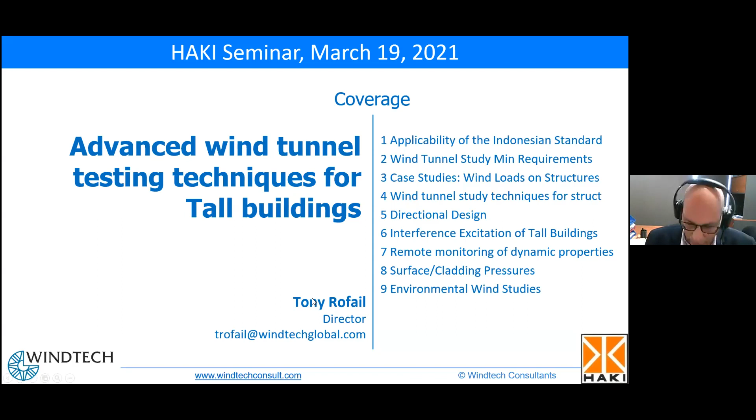Okay, so the Indonesian standard sets out different methods. One of these methods includes wind tunnel testing procedure. Okay, and this is if you can refer to chapter 31 of the Indonesian standard for those details.

Okay, but this wind tunnel study carries the same weight as using the Indonesian standard. Okay, so if it's undertaken, it must supersede the Indonesian standard up to a certain limit. So if the wind tunnel results provide loads that are less than 80% of the estimates in the Indonesian standard, then the 80% of the design loads become the lower bound value. So it must be not less than that.

Now, a lot of structural engineers correctly state that seismic design generally governs over wind design in Indonesia. And that is very much true, especially with regards to design for strength. However, equally important to the design for strength is design for serviceability and for occupant comfort due to building motion.

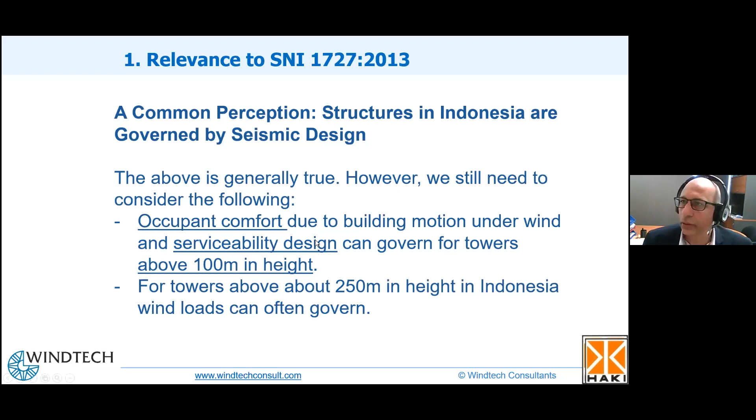Okay. Another aspect of wind tunnel testing, which I will cover towards the end of my presentation, and which has been proven to be a very important part of value engineering for the building design, is a study of the facade design pressures. So on average, from my experience and getting feedback from my clients, there's a 12% saving in the facade package simply by undertaking a wind tunnel study, and that's on average.

So in some cases, it could be a lot more than that, especially if it's in a high density area with a lot of shielding. If the building is much taller than the surrounds and exposed, you might get at least a few percent saving. But if you do the maths, even a few percent saving can pay for the wind tunnel study 20, 30 times over. So it's definitely a worthwhile exercise.

And as a rule of thumb, I would recommend it for all buildings with more than 5,000 square meters of facade area or more than 70 meters in height. So it's almost guaranteed that you will get many times the cost of the study back in terms of savings, because of the nature of codes needing to be somewhat conservative to cover any unexpected or unusual cases.

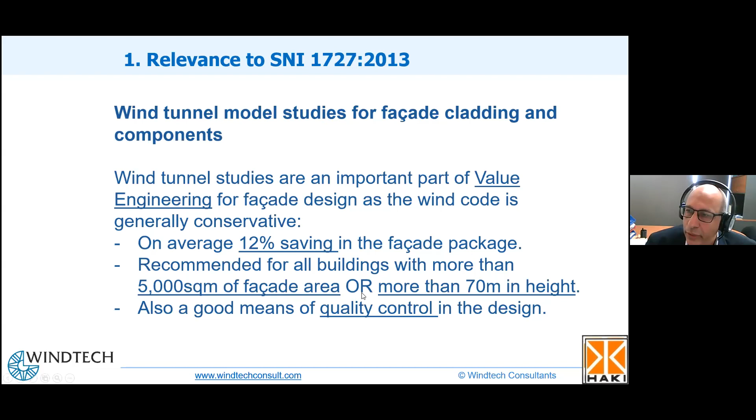Now section 27.1.3 does state that there are limitations in the use of the standard, like any other standard. There are limits to the applicability. And I've underlined the important part of that phrase: buildings that have unusual shapes or unusual response characteristics. Okay, so if you are designing a building that falls in either of those two categories, then you are required to undertake a wind tunnel study for wind.

Okay, so unusual dynamic response could include cases where the design loads are governed by crosswind response, where the standard does not actually cover that case. And as a rule of thumb, this case can occur where the height over width ratio exceeds 5. So basically for the more slender towers. And again, buildings taller than, say, 150 meters, you could get crosswind governing based on the Indonesian climate. So just keep those two things in mind.

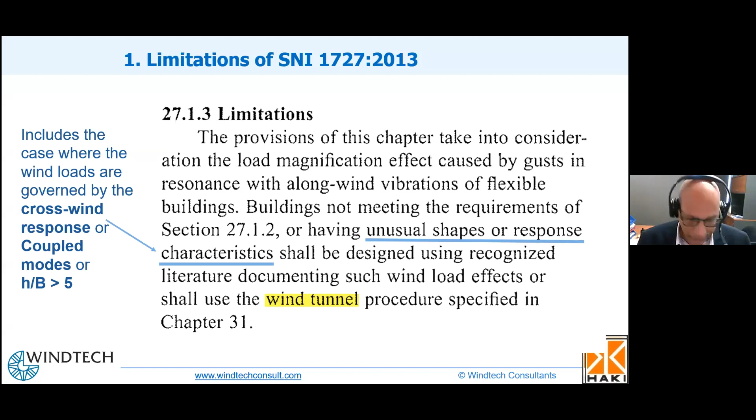Okay, so I've covered cases basically to expand a bit on the crosswind response. There's a very good guide in the Hong Kong Code of Practice. It says that buildings with height over 100 meters in Hong Kong, but that's in the Hong Kong climate, so I translate that to be over 150 meters in Indonesia.

Okay, and they specify height over width for the smallest overall plan width. Where that exceeds 7, okay, so I would say 7 or 5 or 7, something in that range would potentially trigger a case where the crosswind response would govern, which is not really accounted for in the Indonesian wind code.

So if the above is true, but the fundamental frequency is higher than 0.5 hertz, then you don't have to worry about that. Okay. But if it is lower than 0.5 hertz and it satisfies the above, then a wind tunnel study is required.

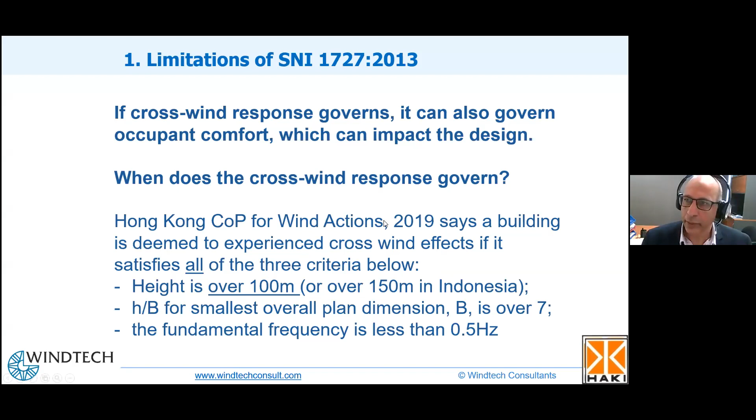We need to cover off some important aspects which I covered at the beginning, and that is: irrespective of what the loads come out from the wind tunnel study, they must not be less than 80% of the design loads stipulated in the Indonesian standard.

Next point - I'll cover this later, but another limitation of the Indonesian standard, or all standards really, perhaps with the exception of the Indian standard, is that there is no provision for cases where there is an interference excitation. So what does that mean?

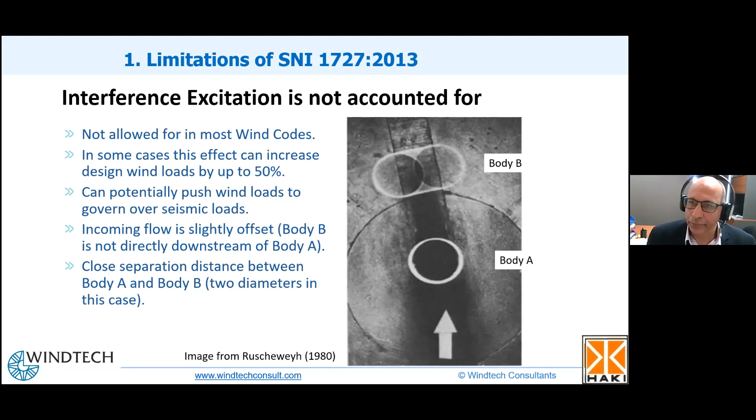It's very important to include the surrounding buildings up to about 400 meters radius. Why is that important? It's because of the effect I just mentioned earlier, the interference excitation. Based on the research I undertook in the late 1980s, I have found that going past about 400 meters, buildings don't generate that much of an influence in terms of interference effects. Hence, it is sufficient to incorporate the effect of the building morphology around the site only up to that extent.

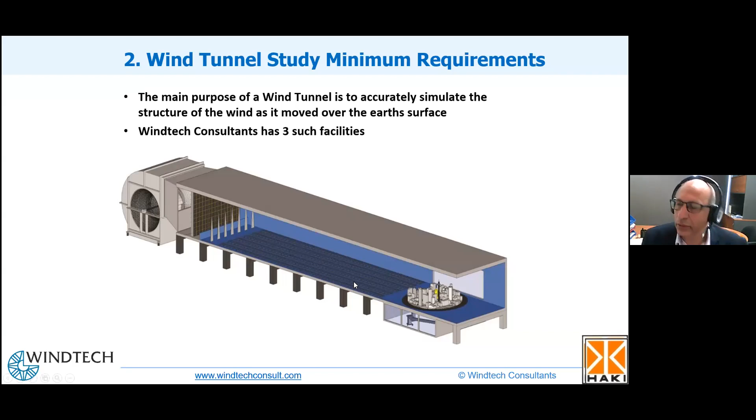Beyond that radius, it's still very important to match the same behavior of the wind as it approaches the precinct, and to the right scale. So what are the factors that tell us we are matching this profile very well? Before I go into that, I have to explain that sometimes this is not a very simple task - just assessing what is that terrain upstream.

And that's done for different directions, obviously. So not only does the wind speed at the site change with direction based on the wind climate, but it's also influenced by the upstream terrain. So all of these have to be factored in when we're modeling it in the wind tunnel.

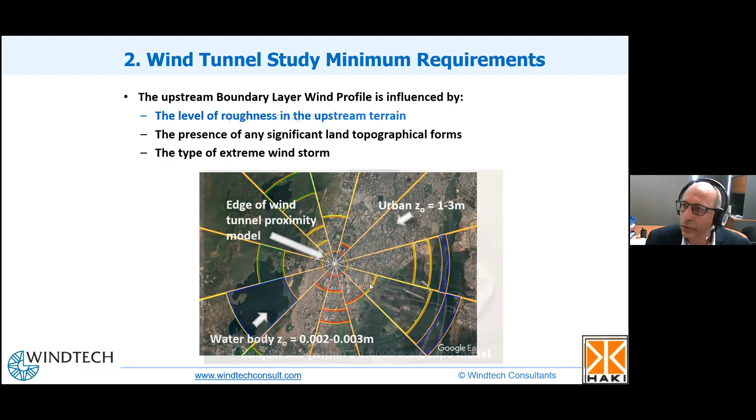Another factor is if the site is very close to a significant mountain or hill, that can also distort the flow significantly. As a rule of thumb, if the height difference between the peak of the mountain and the site is more than 10% of the distance away from the peak to the site, that would indicate the effect can be significant, and it's really advisable that this effect is actually quantified using this type of study, which we call a topographic study.

And this doesn't happen very often in Indonesia, but it may. This is just for your information.

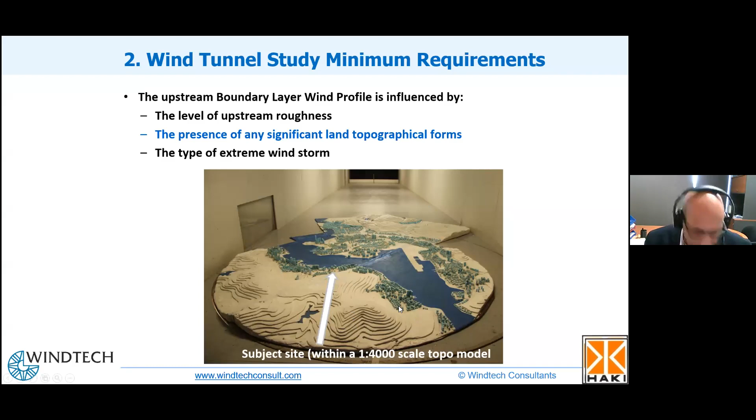But that shape has to match between the model and the full scale, okay? And same with the turbulence intensity. So these are the two most important parameters, and they help us to ensure that we're matching that at the correct scale in the model.

Another important factor is the spectral density. So if you take the wind speed and you apply a fast Fourier transform to see where the energy is concentrated at what frequency...

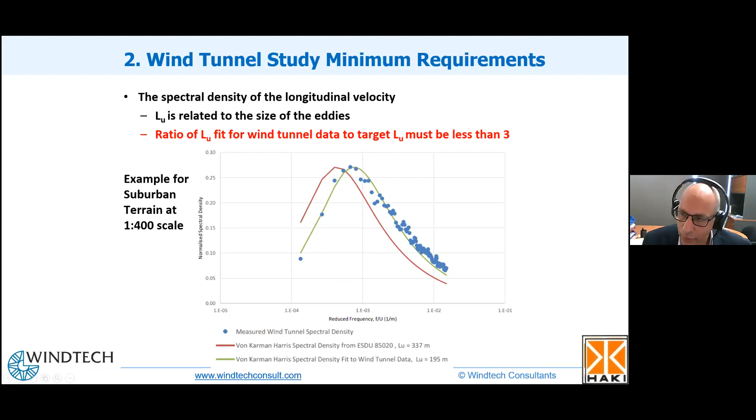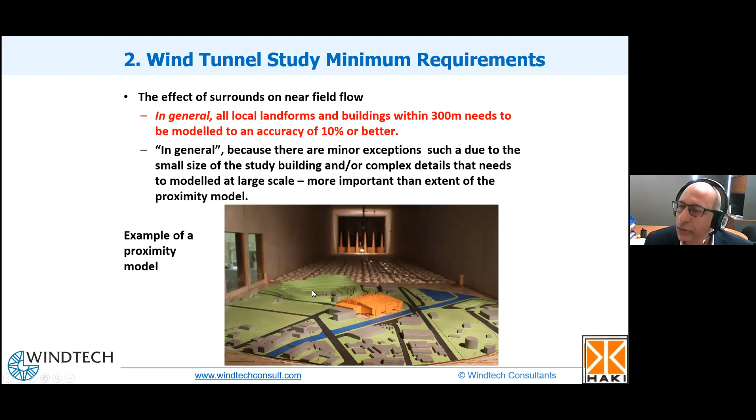The study model within the surrounds should incorporate any other effects, not just the surrounding buildings, but any topographic effects, such as this small section of hill you can see in the background.

Now, blockage is a very important consideration. The wind tunnel cross-section versus the cross-section of the model at any point along the cross-section of our surrounds must not be more than 10% of the cross-section of the wind tunnel. If it does exceed that, there will tend to be a speed up of wind around the model, which could exaggerate the effect of the wind, which is what we don't want to happen.

Now, in this particular wind tunnel, one of our 3 wind tunnels, it's got what we call a blockage tolerant test section. It's got this open plenum behind a slatted or partly porous ceiling, which lets some of the air seep into this plenum and back out. Tests that we've done with this design allow us to increase the blockage up to about 17% if we need to. But the model you see at the moment is already less than 10%.

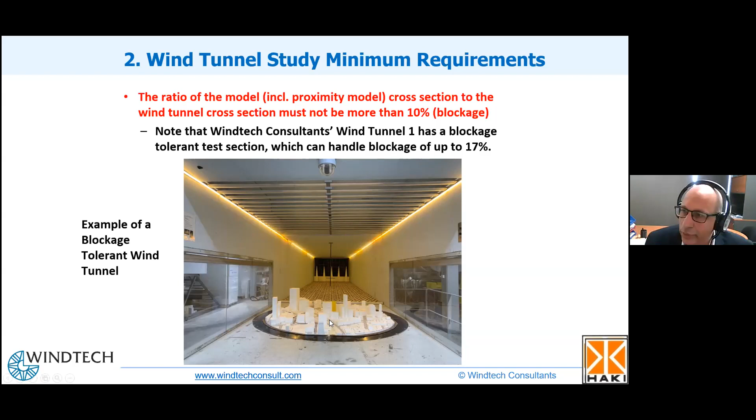Okay, and finally, but not a small factor, a very important factor is the speed in the wind tunnel must be high enough. The speed in the wind tunnel and the scale or size of the model needs to be, the combination of those two contribute to something called the Reynolds number. So the mean wind speed at the building height times the characteristic cross-section width of the building, divided by the viscosity constant of air, must be larger than a certain minimum value to ensure that the flow regime around our building matches the real world.

And you can see here, for different Reynolds numbers, you get different flow regimes. That's different for circular shaped cross sections compared to square or sharp edge. For sharp edges, they're not as sensitive to this effect as circular cross sections, so they need to be particularly high for circular cross sections to match full scale.

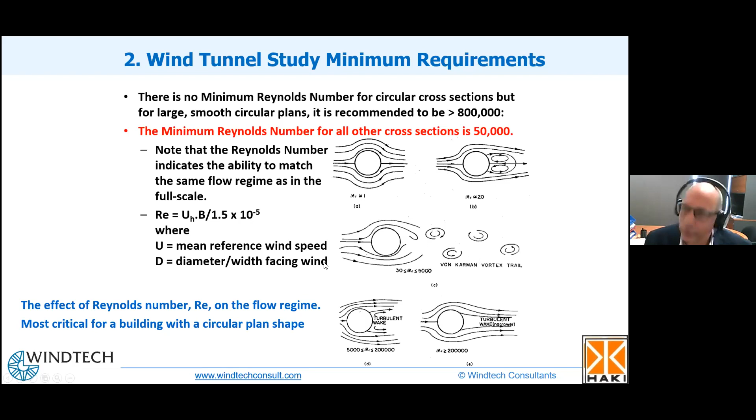Now, what are the typical outputs we get from a structural load study? First, at Windtech, we provide a headline overturning base moment about the translational axes and the torsional mode, and compare it against a number of standards.

And it's for that reason that if you do find crosswind is governing, you are advised to immediately undertake a wind tunnel study, because the only takeaway from using these codes is just to do that check. I would not base the design on the code estimate if crosswind is governing - it's just a check to indicate that you should be moving to a wind tunnel study.

We also provide outputs of the tip acceleration at the top of the building, in the area where you would experience the highest acceleration.

Obviously, as you increase the natural frequency, the acceleration response reduces. And the same applies to the ultimate loads and serviceability loads - which is the opposite of what you see with seismic loads. With seismic loads, if you drop the frequency, the response actually reduces. So for wind, it's the opposite, okay?

And that's because for wind, the peak part of the spectrum is in the 0.05 to 0.1 hertz range. So as you lower the natural frequency of the building - meaning typically when the building becomes taller and taller - the dynamic response becomes more amplified.

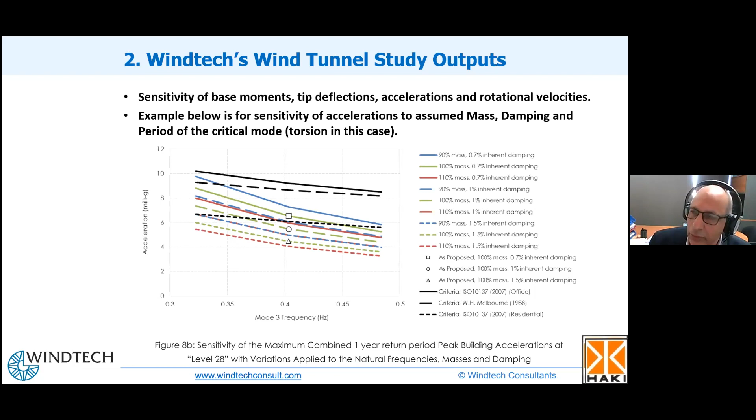So that's a bit of an overview of the outputs that you get from a structural load study. I'll cover a bit more on the method, or how we do those studies, later.

Now, before we do that, I'd like to give you a bit of an overview of some interesting projects that Windtech worked on, and how they performed aerodynamically speaking. This tower here is in the Gold Coast, and it's called Q1 Tower. It's still the tallest building in Australia.

Now, this building has a pointed aspect, and that point is pointing in the direction of southeast. Southeast happens to be the most common wind direction for the Gold Coast, coming over the ocean. So by having the more aerodynamic shape pointing in that direction, that's a very good approach, and it ensures you have a very efficient structure.

The other feature you may be able to see is there's a bit of a step out here. It's just a small couple of meters on both sides, and that step out stops near the top. It's like a double-stepped change in the cross-sectional width. By changing that by those few percent over the height of the building...

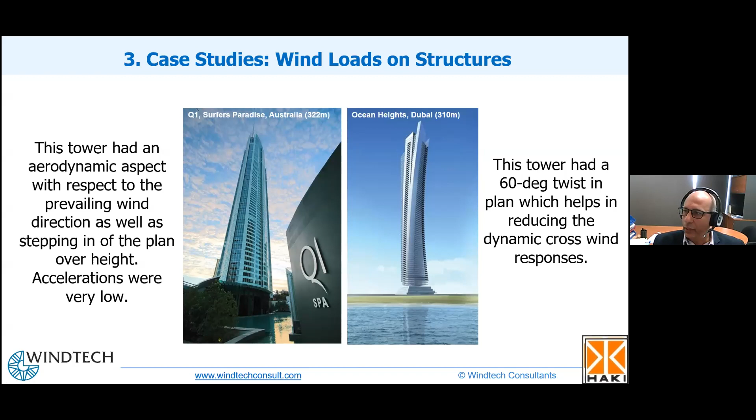So again, we see fairly significant reductions. In fact, we found the base moments on this tower, which is just slightly lower in height, at very similar design wind speeds, were even slightly less than what we saw in Q1. This is another form of tapering. This is Index Tower - it's not a step tapering, but still tapering nevertheless, and still very effective.

Another approach that we found is actually very effective in improving aerodynamic efficiency is where you have two slender tower forms rigidly connected at high elevation. In fact, in 2007 Windtech published what is still currently the best and most accurate method to assess the effect of this case - the substructure analysis method.

What tends to happen with these linked structures is the peak response, or peak action of wind, on these two towers hardly ever happens at the same instant. So if you imagine the wind forces peaking on this tower, but not on this one, what happens? This tower acts like a buttress to support the other one.

So you essentially get a much better ratio of resistance versus wind load in a situation like that. And vice versa, when it peaks on this tower, that tower is providing some support. What we tend to see is that the dynamic response tends to come down for these type of structures.

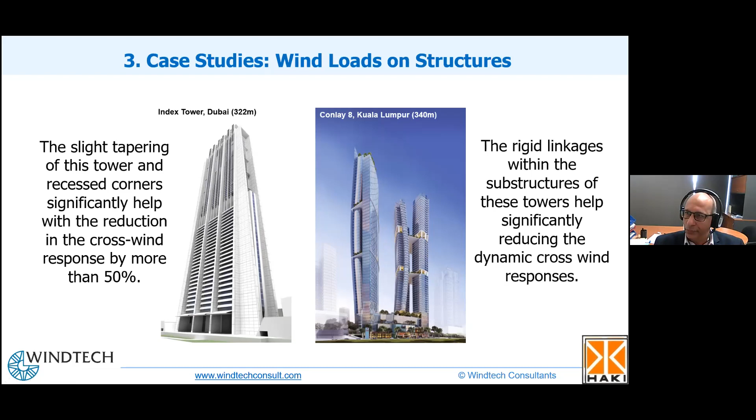Another form, this one in Kolkata, India, is to have recessed corners. That tends to be not quite as effective as the measures I mentioned before, but it provides some benefit. We could understand that the stepping may not be feasible on every site, especially if it's a limited size plot of land. But the corner treatment tends to produce roughly a 15-20% reduction in the dynamic response.

However, because of the slenderness of this tower, we still had an issue with the acceleration response. So there was an exceedance of acceleration response in this particular case.

We designed and commissioned a damper near the top of this building, which you can see in this rendering. This tank is actually a stacked tank, so you have two tanks stacked within that same level. They are designed to be tuned to dampen the motion in both the X and Y translational modes, so each of those is tuned to both of the frequencies. It's a very efficient way to counteract motion in two directions.

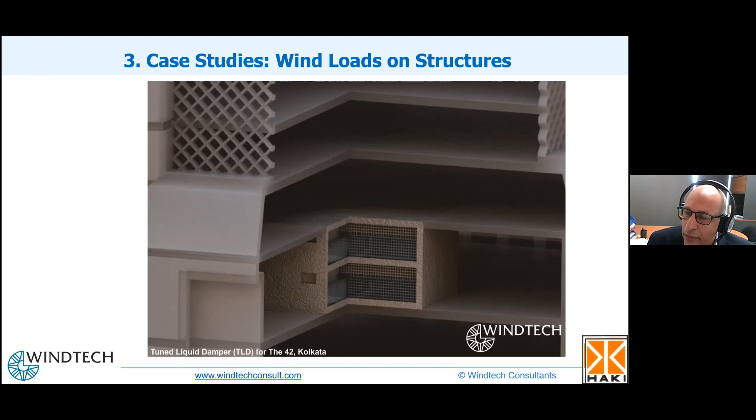This is an interesting case where it's the reverse. We have a layout of buildings where it can increase the response because of the layout. When you have a line of buildings like that, the last building tends to get higher than normal drag forces due to wind. These are kinds of arrangements that codes are not really designed for, so just be wary of that.

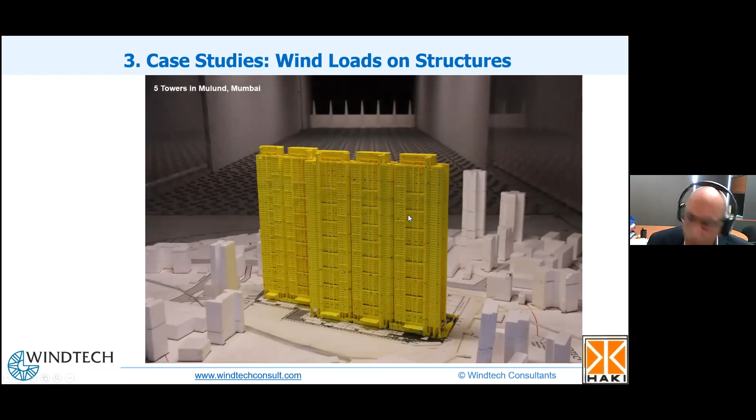These are some other examples of buildings that we worked on. This is another example of a complex building structure. There's actually a lift core that takes people up to, I think, just the level of the neck, and there's a viewing deck up here.

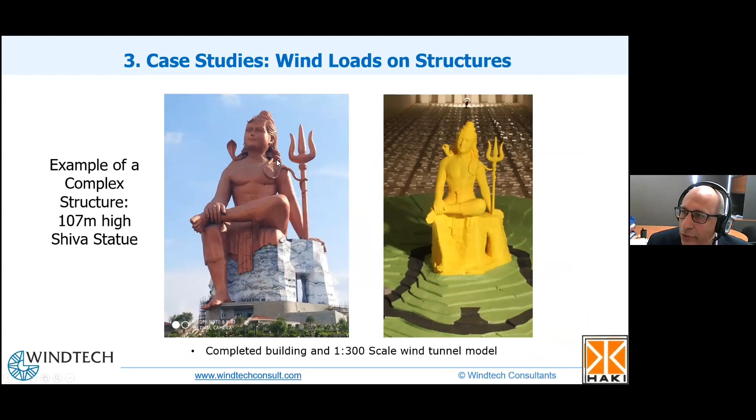We also looked at the loads on this trident structure because of what I mentioned earlier regarding Reynolds number, which is accuracy of flow regime. We had to test the loads on this trident using a larger scale, and just below there is a force balance to measure the forces on this. It's very important to have included the rest of the building, because that definitely does impact the loads on the trident.

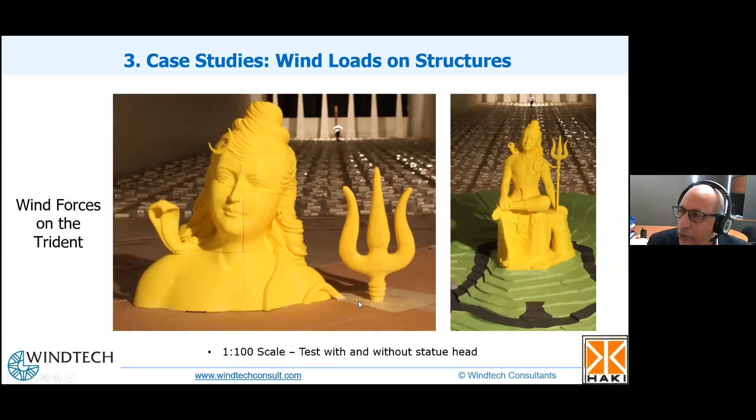Other outputs in this particular example were the facade pressures, certainly way beyond the scope of codes to look at cladding pressures on structures as complex as this.

For structural load studies, there are three methods we can use. There's the high frequency force balance method, which is putting something like a very sensitive load cell inside the building that can directly measure the dynamic forces acting on it. And there's a pressure integration method where you need to sample the pressures on the entire envelope of the building simultaneously, with no phase lag, and then derive from that the dynamic response.

For the first two methods, we only need to know the dynamic action of wind on the structure; we are not simulating the behavior of the structure in the wind tunnel. That's done mathematically: we take a time series of the load and apply a modification to account for the dynamic behavior of the building, normally in the frequency domain. We then arrive at a total dynamic response that includes both the dynamic action of the wind and the additional dynamic response due to the actual response of the building.

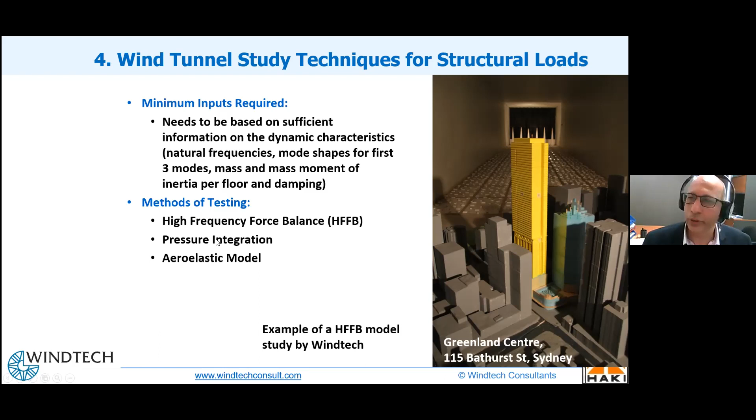I'll explain to you how to assess for yourself if you need to go to an aeroelastic model. It costs about twice as much as the others, but the cost is not the issue - if we can confirm to you that aerodynamic damping is not an issue, you're better off in terms of accuracy as well to go with this. And I'll explain to you why.

Start with the first of the three methods, that's the force balance. The force balance has one limitation, actually maybe two main limitations. First limitation is we need to make sure the model is super light and stiff, because when you take a load spectrum from this force balance, the model itself has its own natural frequency. And you want to make sure that natural frequency is high enough so that it's not in the area that would be of interest for our analysis.

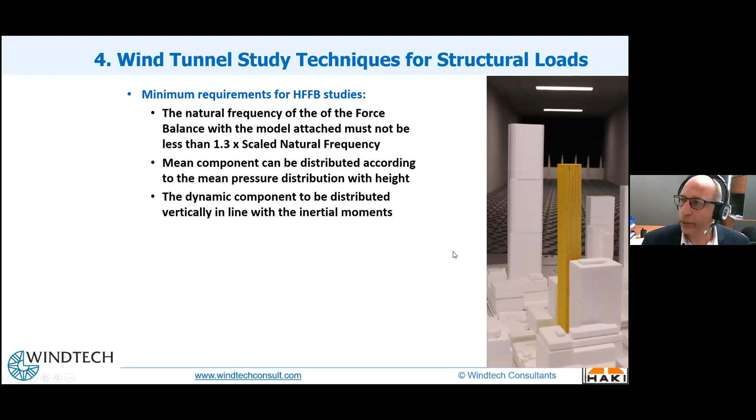I'll explain in the next slide. But the other limitation is we don't have information on how the mean component of response distributes with height. So we tend to estimate that based on code distributions.

So from the force balance, we obtain the overall standard deviation and mean response. Now, the standard deviation response is expressed also in a spectrum. So these are for each of the 36 wind directions. It's very important that these structural load studies and pressure studies are done for 36 wind directions. It should not be less than that.

So you've got the response - this is the reduced frequency, and that's the magnitude of the response. Based on the dynamic properties provided to us, the ranges of reduced frequency are in that range. Why they're a range and not a single number, given the building has a particular natural frequency for this axis, is because the designed wind speed, which is part of this normalization, is not uniform with direction. So each wind direction has a different speed, and that's why for different speeds you'll be moving at different points on this.

But the important thing to note is the model itself has contributed to this little peak here. So that needs to be corrected - we tend to account for that, or basically correct the effect of the model. But if this happened to be in here, meaning the model is not as stiff, it's lower frequency, then we have a problem. So that's very important to make sure the model is light and stiff.

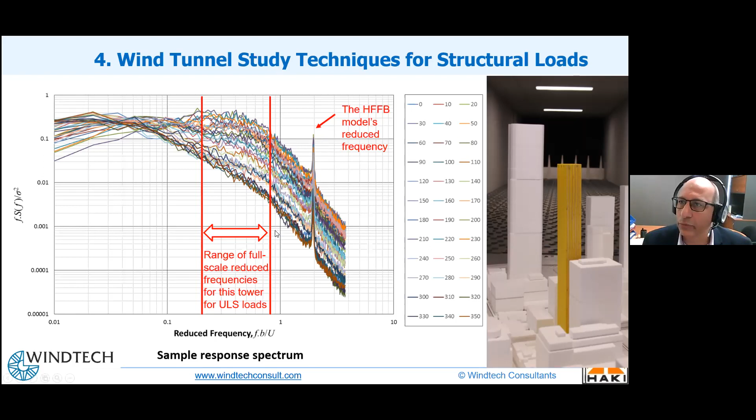The second method for looking at structural loads is using a pressure integration method. So we have pressure taps all over the building, and each pressure tap represents a certain area on the building facade. If you multiply the pressure on that point by the area, you get a force. So that force acting in a particular direction will create a certain base moment about X, Y, and Z, including torsion. By integrating the effect of all of these taps on the base moments, you can get a time series of the base moments. So that's essentially how this method works.

Now, it's very important, though, that you have a high quality pressure measurement system that does not introduce any lag between the first and say 500th channel, for example. Typically you can have 400, 500 channels, since they all have to be able to be sampled within like 30 degrees, meaning 1/12 of a cycle, of a pressure cycle, okay?

Which is a very fast, very precise method. The advantage of this method is that we have very good information on how the mean component of response, which in many cases accounts for half of the peak response, distributes accurately in the building.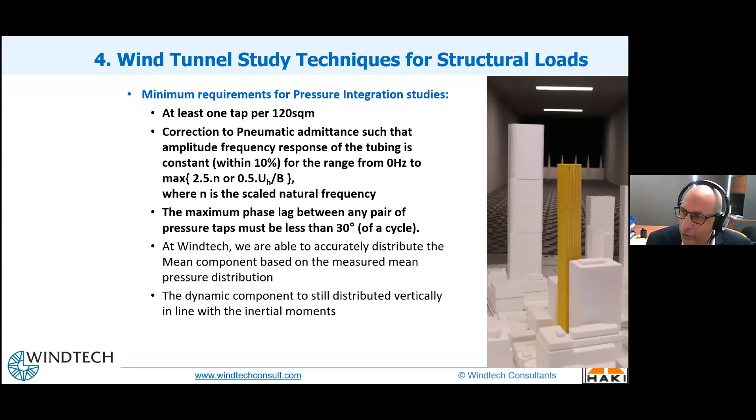The other advantage of this method is we could actually utilize the same data set to determine the facade cladding pressures without having to do a separate wind tunnel test. So there's actually a cost benefit as well.

Now for the third method for structural response, that's the aeroelastic. As I mentioned before, this method is not needed except for perhaps less than 5% of tall buildings, and they're very tall and very slender buildings.

Now the ratio of the building's stiffness in the X and Y sway modes needs to be correct to within 20%. Also, the mode shape needs to be correct as well, to within 20%.

We also, at Windtech, go beyond that. This is based on the Quality Assurance Manual, the Australasian Wind Engineering Society Quality Assurance Manual, where I was one of the key authors. I wasn't able to convince the rest of the committee to put in the other requirements, but that's a minimum requirement at Windtech: to also match structural density, mass distribution, and structural damping in the model.

So when do we know that you need to do an aeroelastic study over a force balance or pressure integration? The key to it is working out the reduced velocity, the design reduced velocity of your building. So how do we do that? That's a very simple expression.

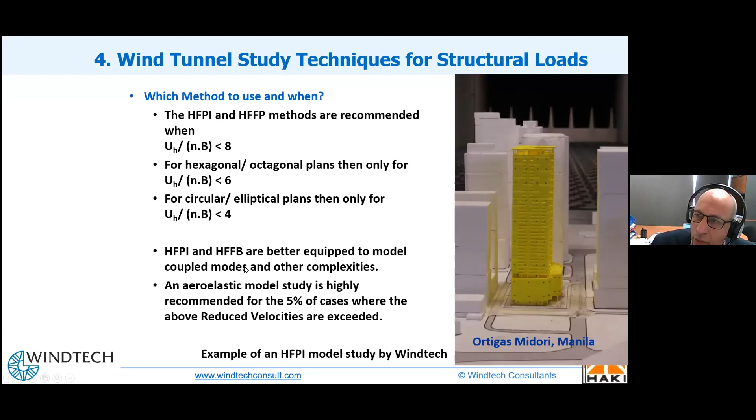That's why, for the same price that some other consultants charge to do just the aeroelastic study, we do both methods. I'll explain to you why doing both is actually much better.

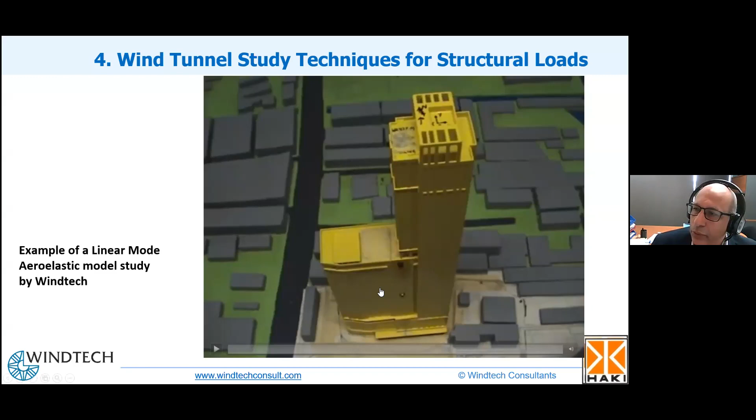Now, moving ahead with this example — here we did a HFFB force balance study as well as an aeroelastic study, which is what we at Windtech always like to use, this hybrid method, and I'll explain why that's so much better than just using the aeroelastic alone.

So when we do that, we overlay the results from both methods on the same graph. This is for moments about X, and this is moments about Y here — the two translational modes. You can see that they collapse quite well. You should be able to see that the means collapse exactly as well, because there's no reason why they shouldn't.

Now in the maximum and minimum values, you notice there's a departure with the aeroelastic model. You can see the aeroelastic has an increased response from these angles of attack, roughly east or southeast direction, but for other angles of attack, you don't see much of a change. What that tells us is that aerodynamic damping for these angles of attack is negative, meaning it actually takes away from the structural damping, and by doing that, the response increases.

Luckily in this case, the angles of attack were not governing the design, and the angles that did govern were not affected by aerodynamic damping. This angle of attack is when the wind is hitting the narrow face. When you see wind hitting the narrow face, that's where you tend to see increased response. Wind hitting the wide face, you tend to see the opposite - some reduction. That's called positive damping.

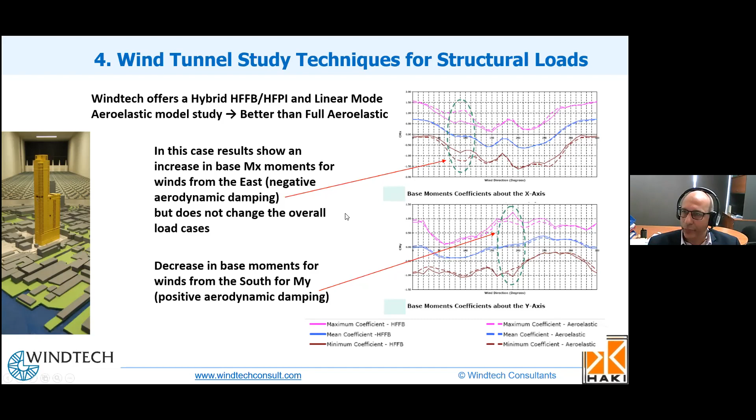So what we tend to see with aeroelastic model tests is that for cases where there's positive damping - meaning the wind is adding to the structural damping because of the actual motion of the tower and the wind - they tend to occur in the directions that really affect the design. So overall, we're seeing roughly a 20% reduction in the base moments about this axis. Generally, it's beneficial to do an aeroelastic study.

Certainly worthwhile from that point of view. So if we identify that aerodynamic damping is likely to be significant, we highly recommend that it's done. It's good because otherwise you could overestimate your base moments, sometimes leading to recommendations for a damper which may not actually be needed if we did account for the aerodynamic damping effects.

And for cases where you have an oval or circular cross section, you may find that even in serviceability loads, you will tend to under design. It's the opposite - you tend to actually have negative damping effects for these shapes, so be very careful with that. The motion in the wind tends to amplify the response. Generally not recommended for very tall buildings for that reason.

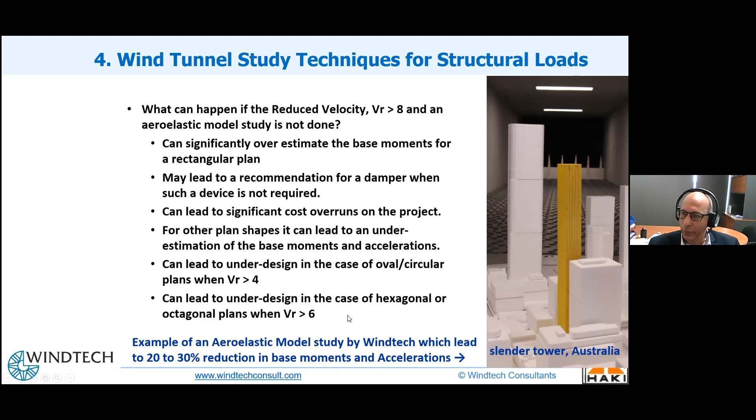Similarly for hexagonal and octagonal shapes. So basically square and rectangular shapes are generally preferred for very tall buildings for that reason. As I mentioned, we tend to get 20 to 30% reduction for the square rectangular shapes, but not necessarily - the opposite is potentially true for other shapes.

This is another example - this actual model is in Australia, somewhere in Melbourne. Very slender, tall, roughly square-shaped building in plan. You can see here in the ultimate loads, ignoring aerodynamic damping is the dashed line. With aerodynamic damping, there's roughly a 20% reduction. Overall, we're within a base moment coefficient of 1.5 compared to 1.9. It's a big saving for the client.

Now for serviceability, it actually goes even higher. We actually found that for the serviceability loads, we were getting about a 30 to 25% lower serviceability loads.

You can see here this is research done at the University of Western Ontario in Canada by Professor Vickery. This beta is actually not aerodynamic damping itself, it's a function of aerodynamic damping. But you can see that this beta factor becomes positive beyond 8, for that mechanism, for the crosswind response for wind normal. Whereas in the other direction, where we don't see a reduction, it doesn't tend to be positive.

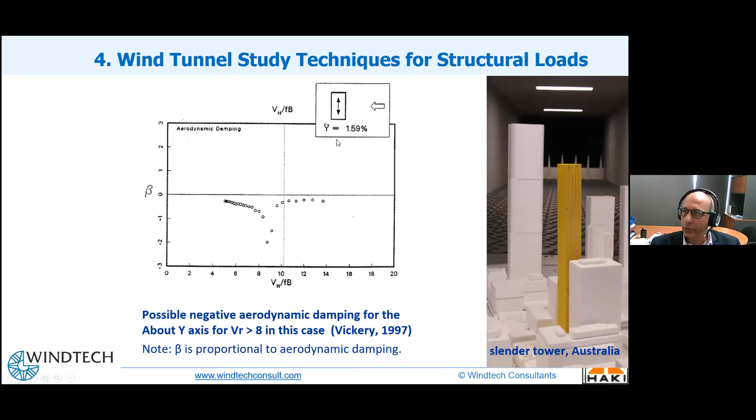Now this is an example of a project in Sydney, a very slender building in Sydney CBD. We tendered for this, and the tender was correct. It had the right scope. You need to do an aeroelastic study. We lost this on price because the winning tenderer didn't include an aeroelastic study.

They only did a force balance. But what happened is we found out later that the loads were very difficult to manage by the structural consultant, and eventually the site was sold to another developer. It just goes to show you how sensitive these tall slender buildings are to wind, and how using the correct technique is very important for the viability of the project. Another issue with this building form is that it's a uniform shape all the way to the top, so not the most aerodynamic form you can achieve for a height and slenderness like that.

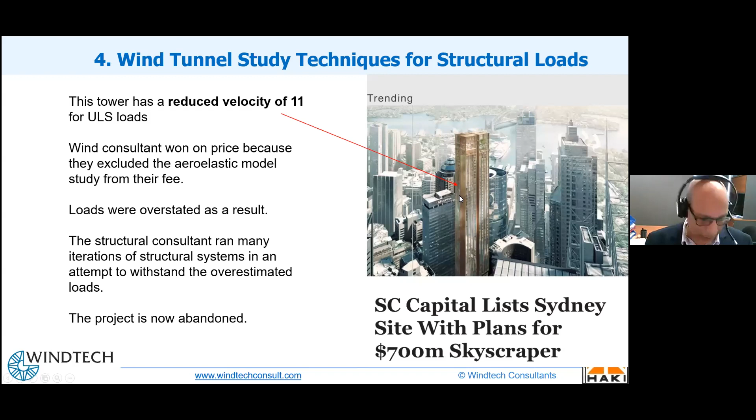Okay, so next topic: once we obtain the wind tunnel results, you'll notice I presented some of the results earlier in terms of coefficients, because that's really what you get out of the wind tunnel. But to convert those coefficients into actual base moments in meganewton meters, we need to combine them with the wind climate data.

There is no single method used by various wind consultants in that regard. The most common method is using direction multipliers, what we call the sector method, seeing which direction creates the largest combination of velocity, pressure, and aerodynamic coefficients, and then designing to that. This method isn't bad - it's actually quite good, but it tends to be a bit conservative.

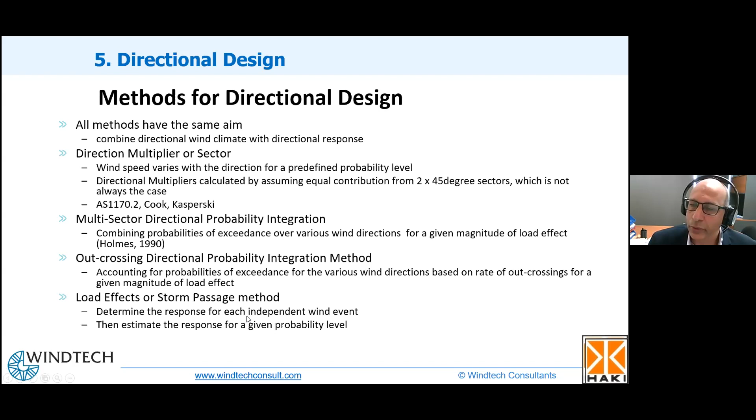But I'll show you a couple of slides on how the direction multiplier and these different methods compare against the storm passage method. Keep in mind that at the higher return or longer return periods, the storm passage method's resolution is a little bit poor.

So just going back to the direction multiplier method, as I mentioned, it's essentially looking at each wind direction independently. First, establish a design wind speed for each direction using a direction multiplier. That direction multiplier has embedded assumptions in there which are not always what actually happens in the real world, and that's the main reason why this method tends to be somewhat conservative.

But it's still used in many codes, and it's not a bad method. What we do is, for example, if we're looking at cladding pressures, you obtain the aerodynamic coefficient from the wind tunnel, then multiply it by the velocity pressure to get a pressure value for that wind direction. You do that for all wind directions, and the highest pressure from a given direction becomes your design value. So that's essentially how this works.

Now, with the multi-sector method, let's go to the outcrossing method. What it does, if you go back to this equation, it says, okay, let's assume a pressure of say 1 kPa. What would be the corresponding wind speed for different directions? The coefficient obviously changes with direction, so for a given 1 kPa pressure, that will also change because of the change here. And so you end up with this locus of basically a wind speed, a corresponding wind speed for a given pressure assumption.

Then you run your wind climate data through this and count how many times the wind speed crosses that number for the different directions. Then you change the pressure assumptions from 1 kPa, say, to 1.1, and repeat the whole process. In the end, you get for each direction a number of crossings at different levels of pressure. Then you can determine from that what is a probabilistic assumption for what's a statistical peak for each wind direction.

Now, one of the main problems with this method is it needs to work from a parent distribution. As you can see, it runs hourly mean data through, and because the coefficients are based on mean reference wind speeds, they need to apply some kind of correction to relate to an extreme event. So this method tends to be okay if your extreme wind climate is governed by very long duration windstorm events, known as synoptic winds. If it's a thunderstorm-governed climate, like everywhere in Indonesia, it doesn't work very well.

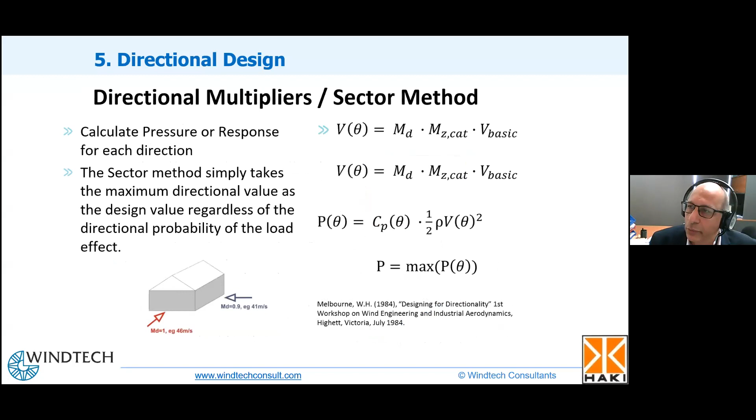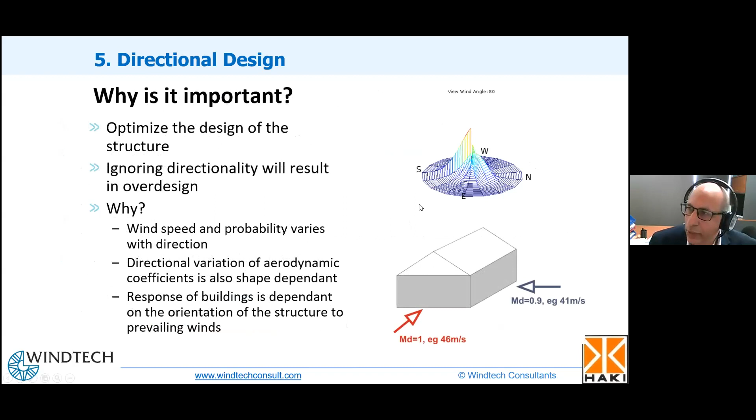Now for the multi-sector method. It starts off with the same approach as the outcrossing method. We run with say a 1 kPa value, and look at for each direction what is the probability of exceeding that, and sum up the probabilities. The difference here is we don't base it on a parent distribution - we actually have an extreme climate model. So we have something that looks like that, but based on monthly extremes. We don't need to do this transformation in the end because we obtain these probabilities directly from this extreme climate model. That's the real advantage here.

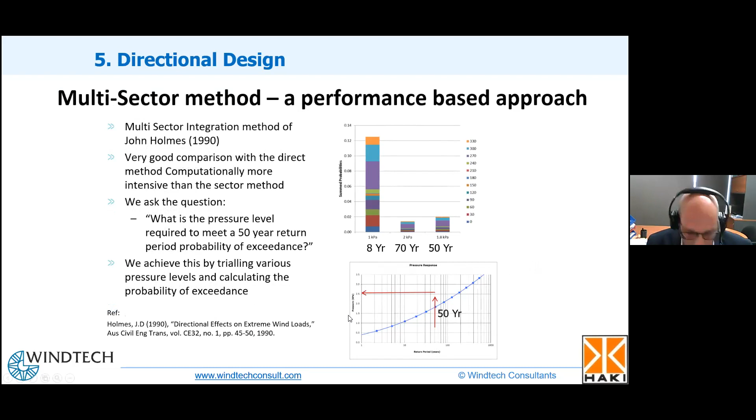This may sound a bit too technical, but the implications are quite significant, so it's important for you to understand this. What we do is iterate through different increments, and this is essentially what happens in our automated process. Then you can interpolate between these iterations to get, say, for a 50-year return, the corresponding design pressure, say 1.8, which is a 0.02 probability.

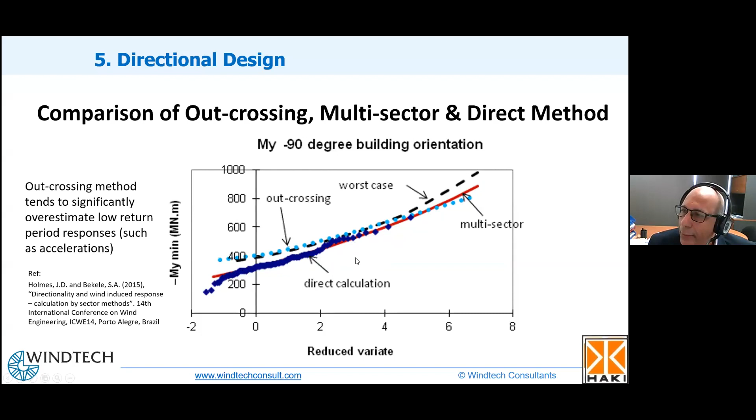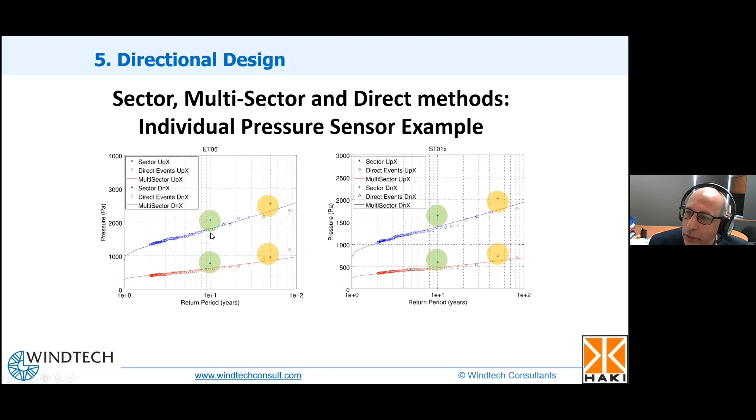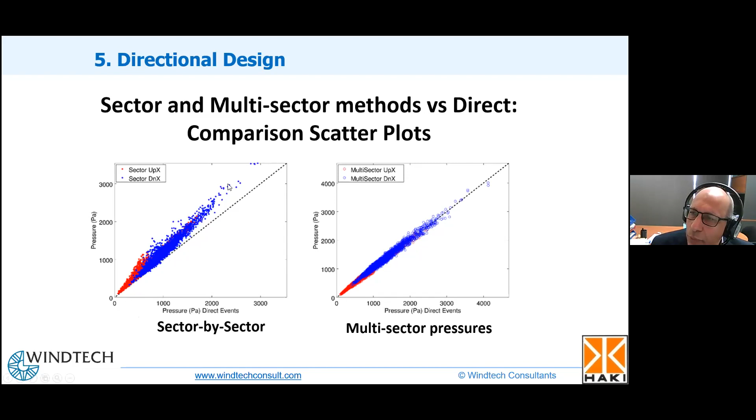I've already introduced interference. Let's see how we can predict interference. So when does interference occur? The answer depends on the following factors.

First, the spacing. There needs to be a certain spacing between the buildings. The magnitude of wind speed is a factor, but also the upstream terrain is another factor.

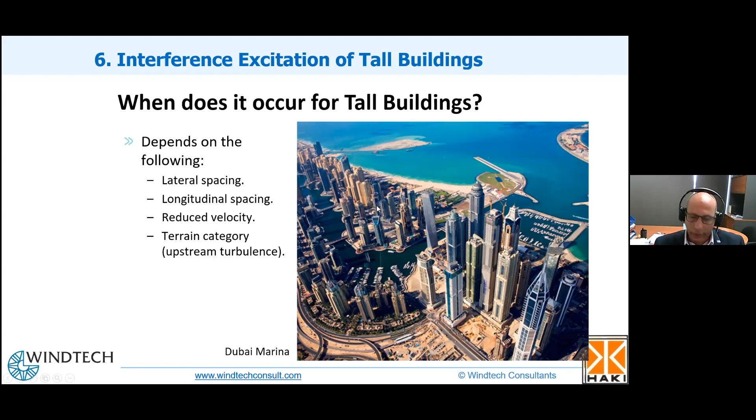Based on terrain, open terrain being fairly basically like a grassy or flat plain, if our study building is located at this point here, and another building of similar cross-section plan is located, say, in this zone here, based on our research we can see potentially up to 50% increase in the dynamic response, and up to about 30% in this zone here. Then very low effects in this zone and in this area here, typically about 20 or 10%. But the important zone to look out for is obviously this zone here.

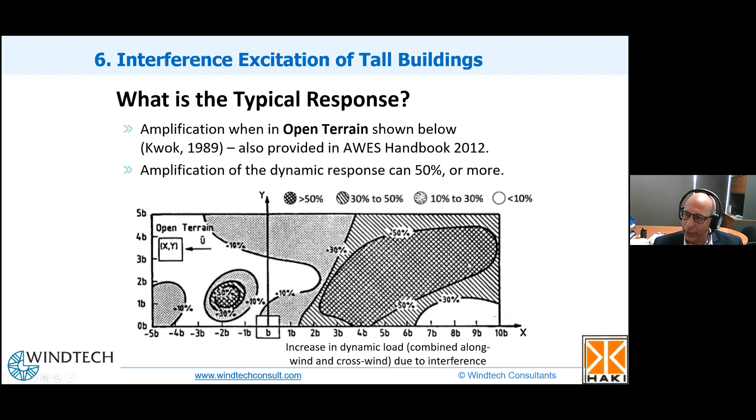The reason is the building located here will create a wake on either side. The mirror to that is true, so it could be either side - that's just telling you how much offset, so it could also be here. Basically, the wake from the side of the building tends to interact more effectively than if the building is immediately in front. If it does happen to be immediately in front, there's a particular distance that's most critical.

Now, as the upstream terrain is more built up - this is actually a sort of suburban terrain, not so dense - it just needs to be not an open terrain for that zone to really diminish substantially.

There's an interesting situation where the buildings are very close to each other, and there's a mechanism I suspect we call a lock-in excitation mechanism between the two. But ignoring this particular spot, it's generally in that sort of general zone, the effect is less. As we go to a high density urban environment, say a city environment, the effect is obviously a lot less.

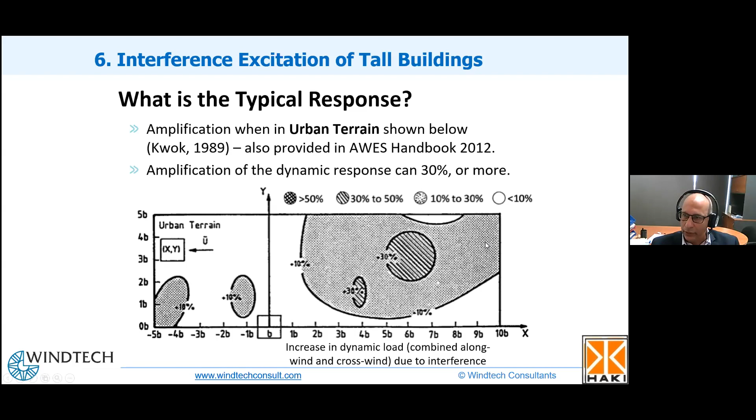Keep in mind this is just with one interfering building. Once you introduce a lot of buildings between the interfering building and the study building, that really becomes not an issue at all. So this is an area where you have a city center just here, a big gap, then this tower, and then our study building. But if both buildings are located within a dense cluster, then you don't have to worry about interference, because the vortices will always be confused by the other buildings.

This is probably the most extreme case I've come across. Here the wind's coming from the left side of the page, opposite to what you just saw before. You could see if there's a point here at the top of the building, that's where the point will actually end up oscillating if the building was in isolation. You could see the crosswind and the along wind. There's a mean component there, and then you have the dynamic component in the along wind. Crosswind, the mean is obviously zero, but you can see the dynamic can actually be higher - the peak can actually end up being higher than the along wind peak.

This is for very slender buildings, like an aspect ratio of 13 to 1. You don't see that happening that often. In fact, if the building is, say, aspect ratio of 5 to 1, it will always be less than the along wind. For the crosswind, it'll be sort of hovering in that zone here.

But what happened is we found this very unique situation. If we place a building downstream in this particular location relative to the same wind speed, plotted at the same scale, you could see this amplification in the response. But this only happens for buildings pretty much facing the ocean, same cross section, very close in that particular orientation. So be careful if you're building a two tower project that are very slender buildings near a waterfront.

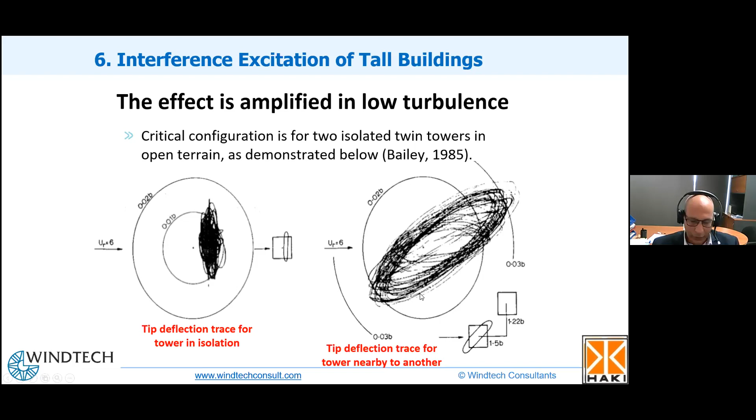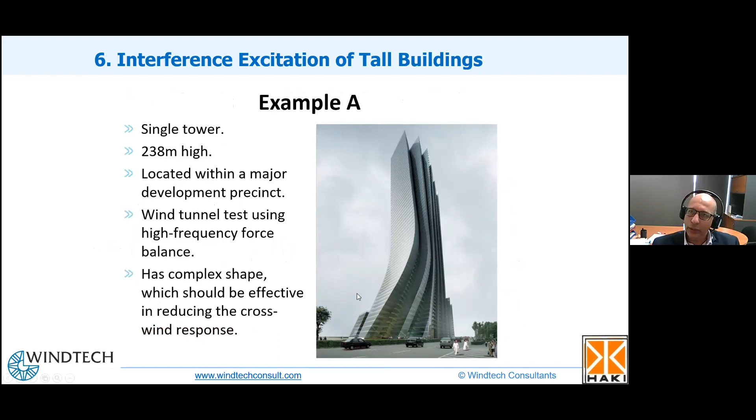Okay, so this is another interesting example. This is a very unusually shaped building in Dubai—sorry, in Abu Dhabi.

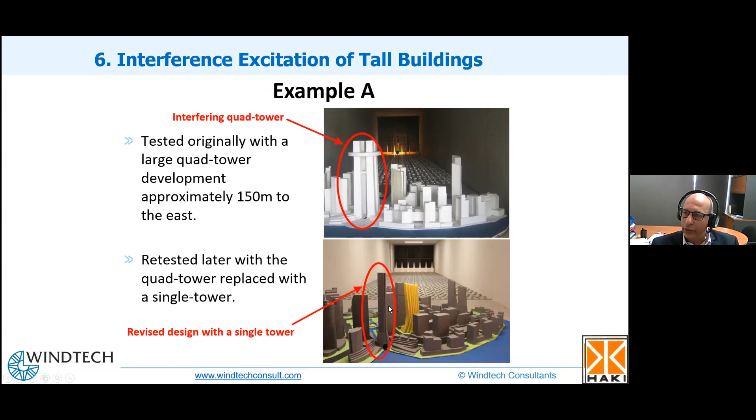That's the building here. Same building, different 3D print process, but it's essentially the same shape. We tested it originally with this very unusual spaceship-looking building nearby, and then the developer of this neighboring building decided to change it to this more elegant design. And what we found is the interference effects caused by this building were quite substantial, but with the new design, suddenly all those effects have diminished. So it was definitely a good idea to repeat the test with the effect of that.

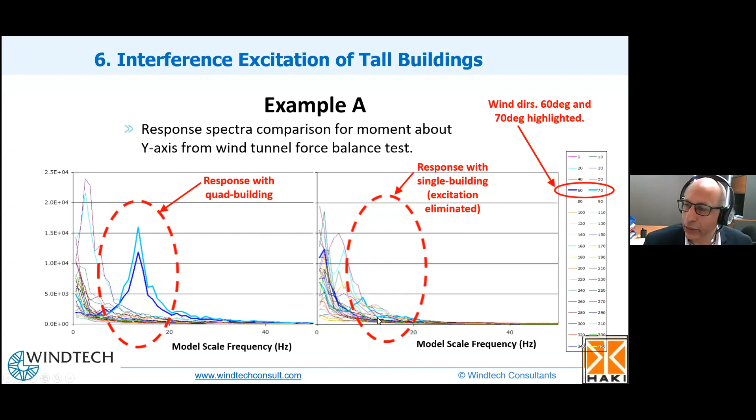You can see the effect of wake interference, and this is doing a load ellipse for 36 wind directions for the same results, just to present in a different way. So this is actual base moments in meganewton meters, and you can see the effect of that quad building or spaceship-looking building on the crosswind response on this subject tower. Removing that quad building suddenly basically eliminates that effect completely.

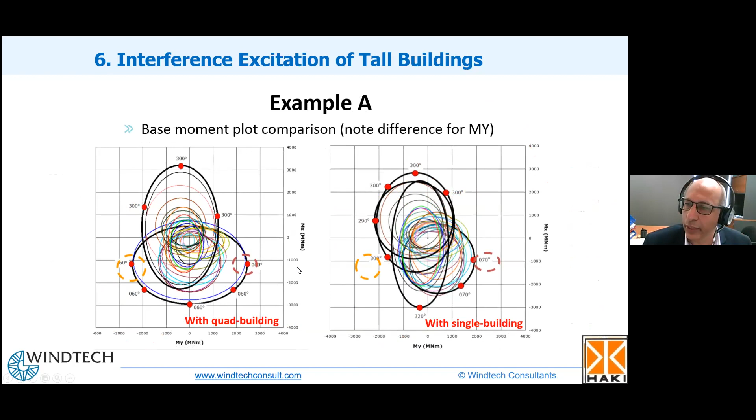We saw a similar effect in Sydney, where we saw this building here, which is head and shoulders above other tall buildings in the precinct. The loads typically you'd expect to be 20+% lower than the code. In this case, it was very, very similar to the code.

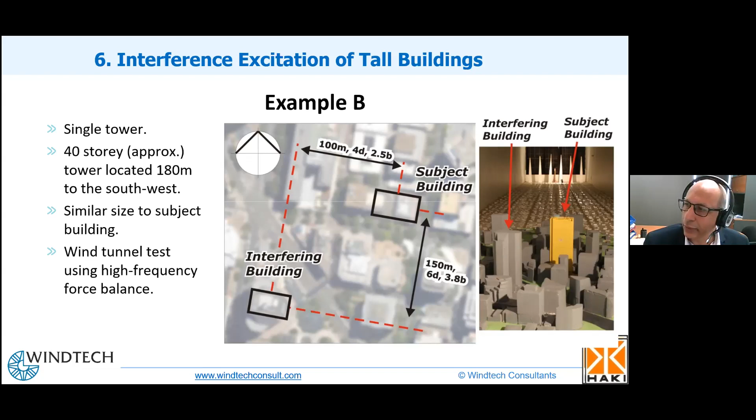And when we got drilled by the structural consultants as to why, we, based on our experience, said, well, this would have to be the cause, because that building happened to be upstream in the most predominant direction for the site. We repeated the test without that building, and very much as predicted, we saw the difference. So this is what we told the client: this interfering building is located here relative to the prevailing wind direction.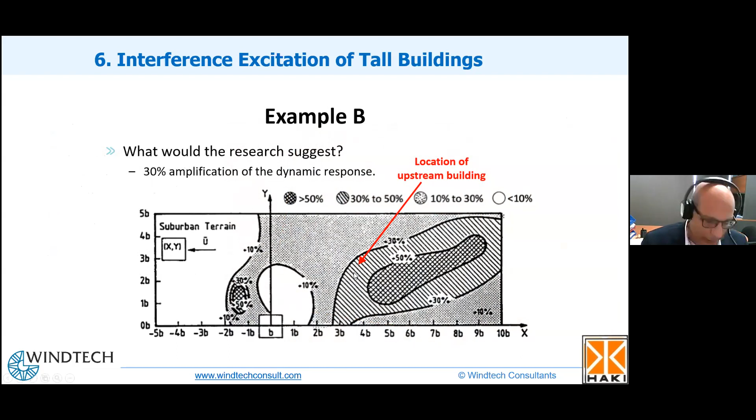And based on our estimates, it'll be a 30% increase over if this building wasn't there. And so we repeated the test, and that was exactly what we found. So from that direction, which was the south direction in Sydney, we got a 30% increase to the response in that base moment. So these effects are true, are real, and I just want to make sure you're aware of this.

So I think I'm coming to the end of my time, so I'm just going to skip this other case study.

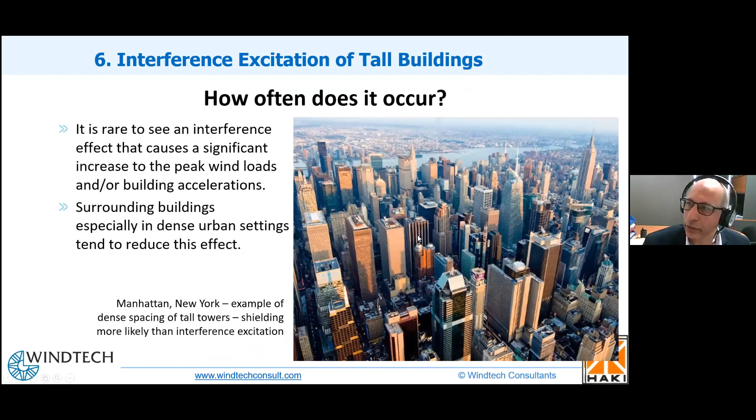So to sum up, if your building is sitting in a climate like this, like Manhattan, don't worry about it. If it's sitting in an area like that, and perhaps if your building is, say, this one here, and there's another one there, there could be some potential effects, especially if the prevailing wind is the southeast, coming around that way—could create some interesting effects.

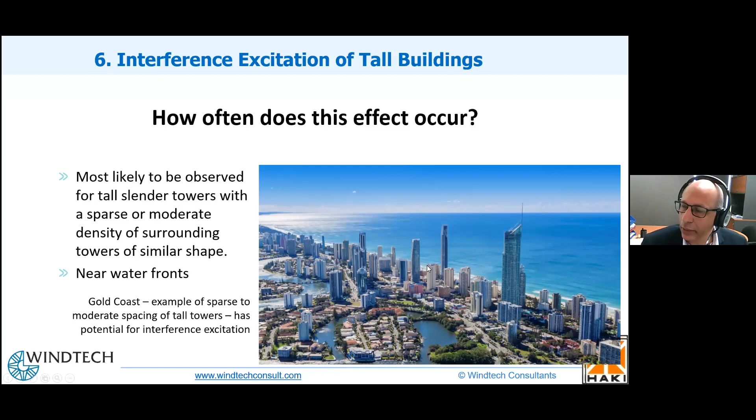Okay, on-site measurements—this is something that a service that we offer. In fact, when we did the wind tunnel study for the Gama Tower in Jakarta, which is currently the tallest building in Jakarta, there was a slight concern of the likelihood of the crosswind response going beyond the seismic design for this building. Okay, this building is 285.

Note this, we did talk to them about the inefficient form, but I think the architect preferred to have this nice, clean, straight edges. So, but in the end, they installed a damper just as a precaution, which we designed and commissioned. Because of this damper being positioned to just reduce that crosswind slightly, we installed a long-term monitoring system to monitor the water level in the tank, as well as the dynamic properties of the structure.

And this is me just doing some spot measurement close to topping out of the structure, so we can fine-tune the design of the damper, which is a big U-shaped tank. That's the tank here that's inside this building.

This is the type of gear that we use. It can measure building movement down to micro-G level, so 1/1,000,000th of gravity. Keep in mind, criteria for accelerations are measured in 1/1000th of gravity, so this shows we're picking up the slightest movement. If you were to stamp your feet 20 meters away, it'll pick it up.

That's the unit that it currently resides in, and it's all you need. All we needed was basically a power point and an internet connection, and we are monitoring the building's motion from our office in Sydney. Anyone can monitor it from anywhere in the world with the gear that we've put in there.

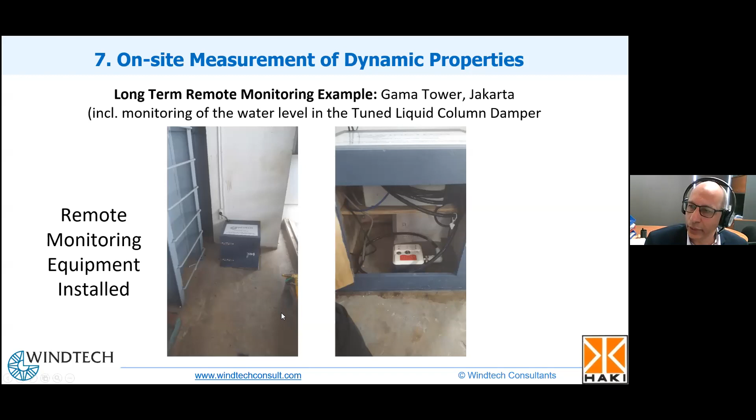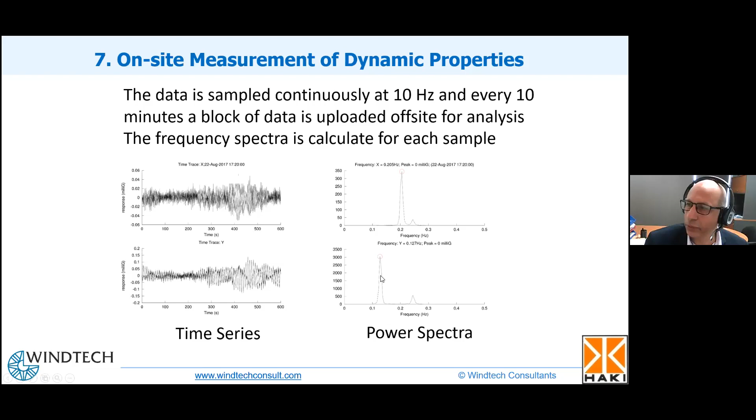The system determines the natural frequencies and monitors how they change over time, which is very important for structural health monitoring. Through spectral analysis, we can monitor the natural frequencies of the first three modes over time, and once we see any step change post an extreme event, that could help the structural consultant identify where the damage has occurred in the structure.

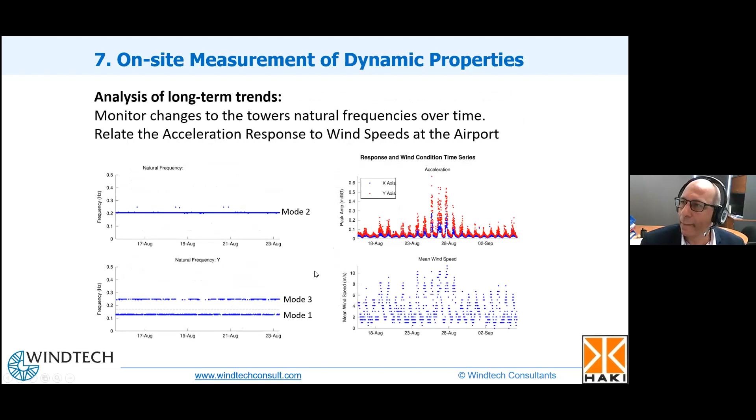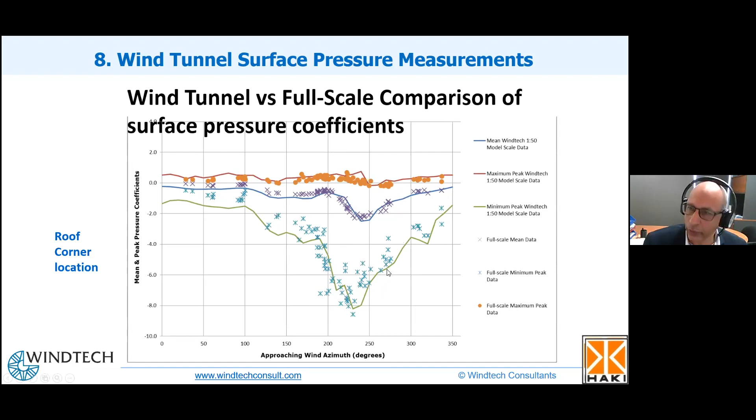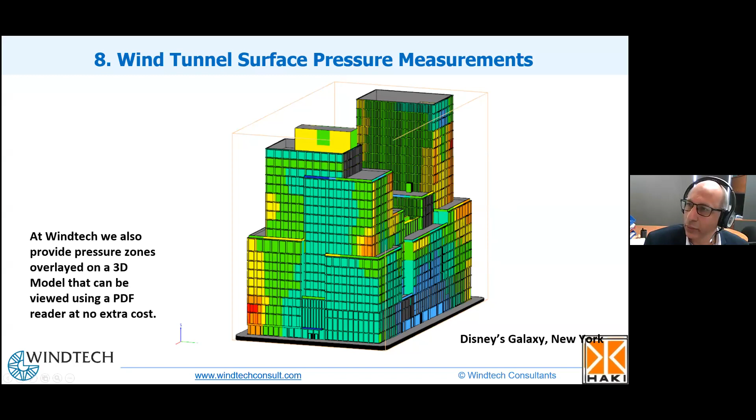So these are the kind of outputs that you get—you get pressure zones. This is in PSF, obviously, because this is an American project. But you can see here we're able to highlight the areas that have the highest pressure rather than designing all of the corners of the building to this red zone, or even a bit higher than that red zone. You can achieve quite a big cost saving by focusing on the area that does need that higher pressure and working to the actual expected pressures.

Finally, I wanted to make you aware that another important aspect for tall building design is to look at the effect of the building on the environment for pedestrians and occupants—not only for pedestrians walking around the site, but also people using communal recreational facilities within the development, making sure these don't become uninhabitable because of strong wind conditions.

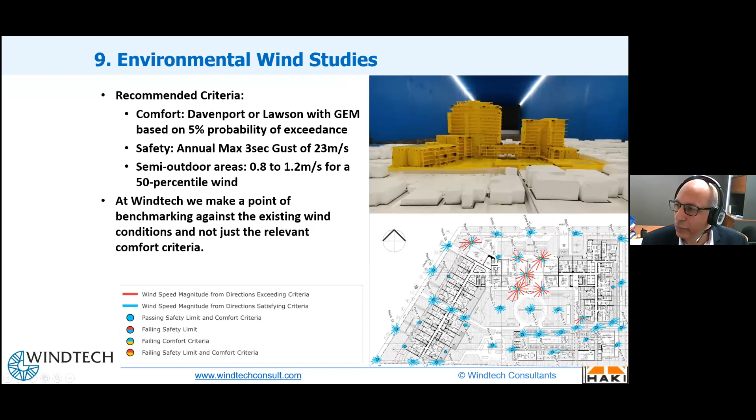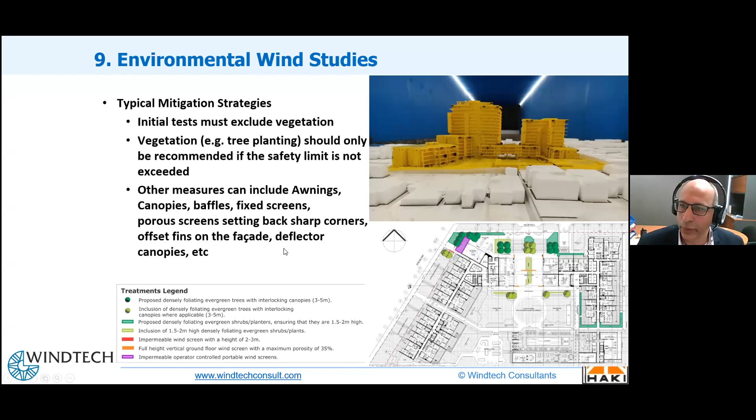At this point I'll finish and hand over to Nick to field questions.